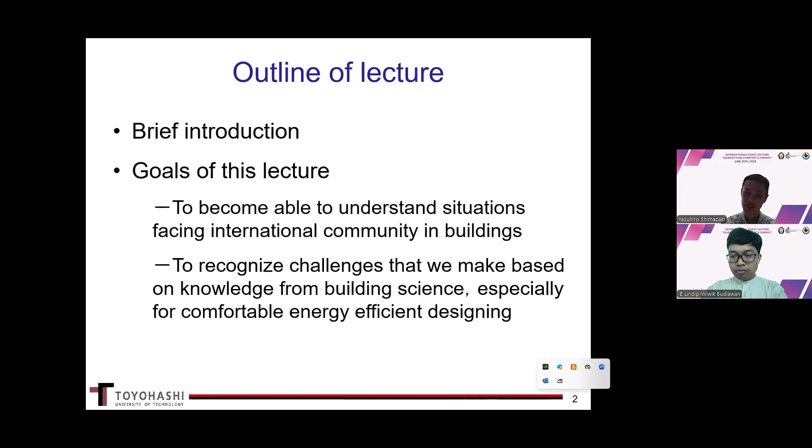First of all, I want to give a very simple self-introduction. Dr. Wiwik already did my introduction, but I'd like to give a small one myself. Then I want to talk to you about creating comfort and energy in a building. After this lecture, I hope you can understand the situation facing the international community in building, and recognize challenges based on knowledge from building science, especially for comfortable, energy efficient design for architecture.

So first part is the self-introduction. It's quite natural you may wonder who I am. I'm a doctor of engineering. I received my PhD from Osaka Prefecture University in 2010, and now I'm an associate professor working for the Department of Architecture and Civil Engineering at Toyohashi University of Technology. Because my primary interest is the human itself, my research mainly focuses on the living environment. I'm currently investigating comfort design from various aspects, such as thermal, acoustic, and material like clothing, focusing on the effect of urban and building components, using both field measurement and numerical simulation. We do both measurement and simulation.

Next, I'd like to introduce our university, TUT. Some students and professionals may know the name TUT because we have an MOU agreement between us. TUT was established about 50 years ago as a research university by the Japanese government. The mission of TUT is to conduct research and education in technological science and develop new technology through scientific inquiry. TUT is one of the global-focused universities, and we promote joint international research and personal exchanges. About 15 to 20% of the students come from overseas.

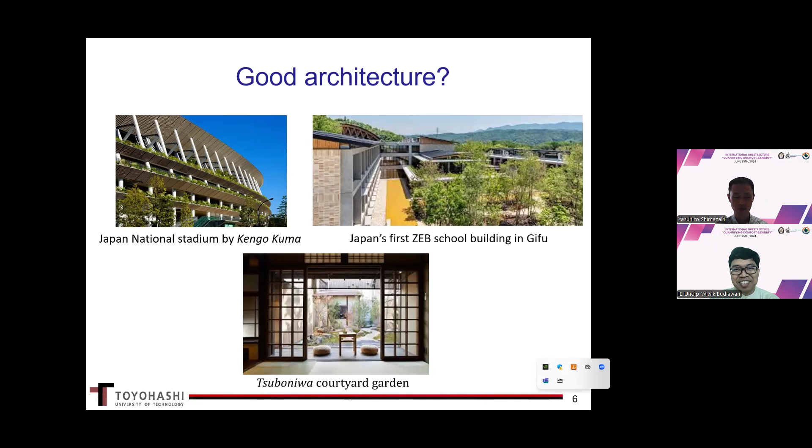The research needs to draw up the concept for the kind of architecture to be built and compile the basic plan. This knowledge for planning and designing drawing is, of course, fundamentally important.

The buildings are, of course, subject to loads and to forces such as earthquakes and wind. So the architect must stand up to these forces while staying safe. The knowledge for dynamics or the technology for structures and materials we use is, of course, important.

And the architecture is for the occupant, from my viewpoint, so we need to look into how we can create comfortable space by planning and designing.

It also requires consideration of the physiology, human physiology and psychology of the occupant, and the global environment. The environment topic is more and more common in architecture. In this lecture, we are focusing on the architecture environmental area.

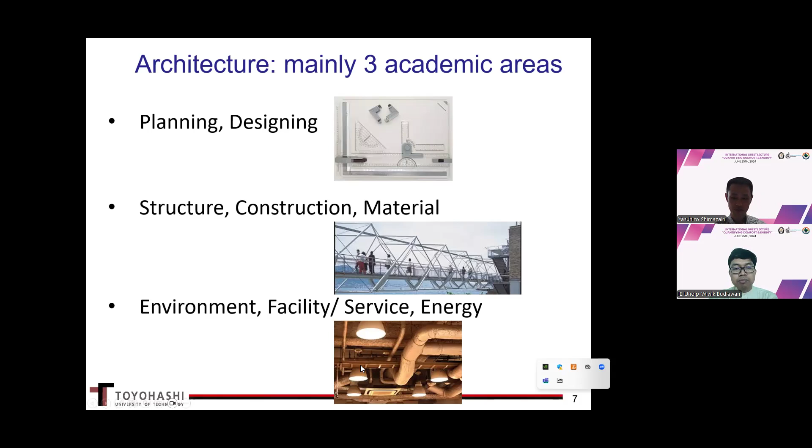So to summarize, building science in this lecture is a field of study concerned with the technical performance of building materials and building systems.

Of course, building science is broad enough to include construction technology, material science, urban design, architecture physics like heat and mass transfer, and also meteorology or climatic knowledge, and so on.

Building science is gathering attention because the issues of sustainability, pollution, energy use, and occupant health are becoming increasingly important.

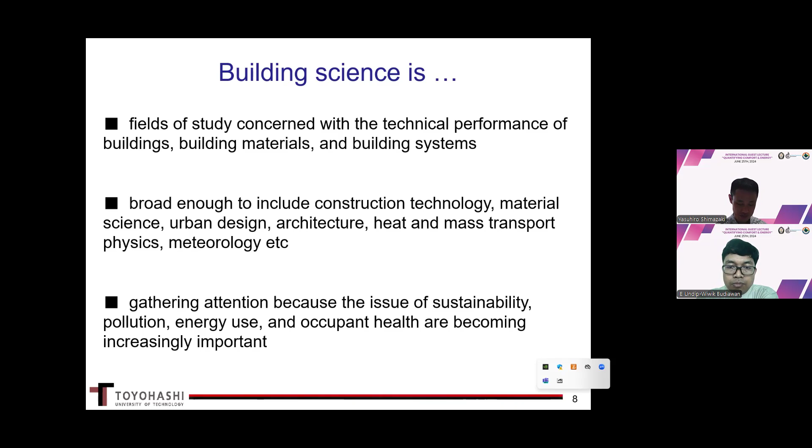Building science is a broad term that refers to our knowledge of the physical behavior of the building - heat, light, sound, air quality - and their impact on energy efficiency, comfort, health, safety, durability, and so on. It is application to the built environment.

Building services is also our field. Building services are the systems installed in buildings to make them functional, efficient, and safe.

So based on the knowledge of building science, we should install building services for comfort and energy, and so on.

So in environmental engineering in architecture, we explore the design and systems in buildings, and the effective use of energy and material.

I have to emphasize that the important mission of our study field is to provide comfort in the building with minimum energy use.

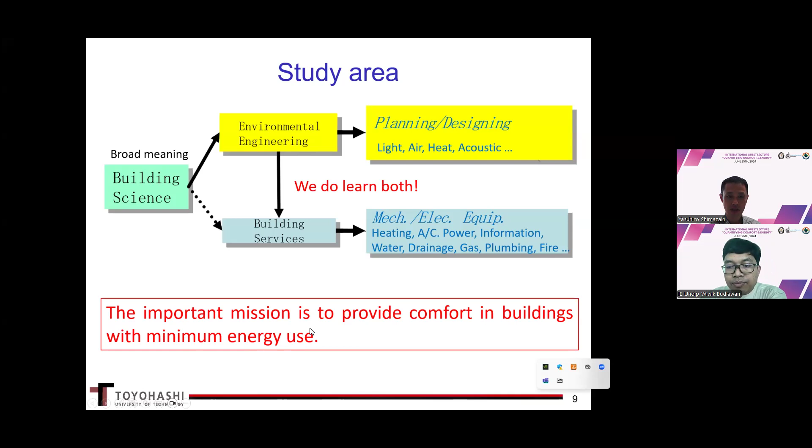So the motivation and objective in this study field is to balance comfortable life and energy saving for architecture and urban design passively.

And to gain a comprehensive understanding of the outer building indoor environment for a better future.

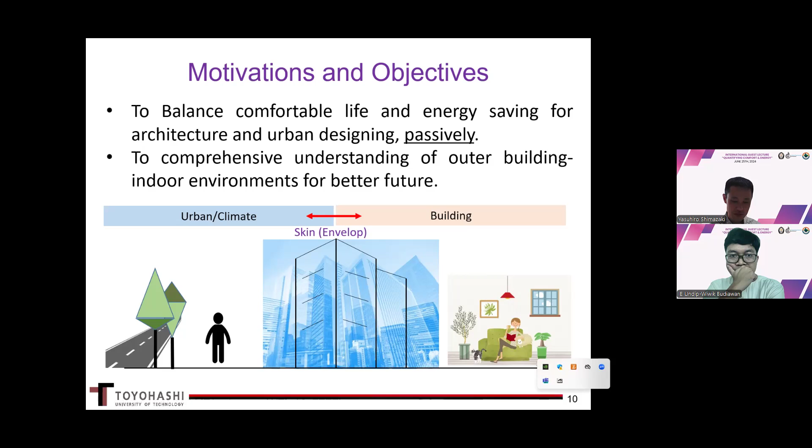This slide shows the conceptual relationship between comfort and energy. In general, the outdoor climate fluctuates largely. In Japan, we experience the cold winter and also the hot, humid summer. So they fluctuate like this, the green line. The outdoor climate fluctuates largely on a daily basis, day and night, and on a yearly basis, winter and summer. On the other hand, the comfortable range, namely the red dot line, is relatively narrow compared to the climatic changes like the green line. So in order to achieve the comfortable level, we have

two ways. One is passive solution, the other is active solution. The passive solution or passive technology, or the active solution or active technology. A passive solution uses architectural means without energy. And the active solution uses equipment or services such as AC, fans, and so on, and of course uses energy. So in this sense, we utilize the passive solution first, then minimize the use of active solutions. Totally combining both the active method and the passive method for thermal comfort, leading to reduction in energy consumption.

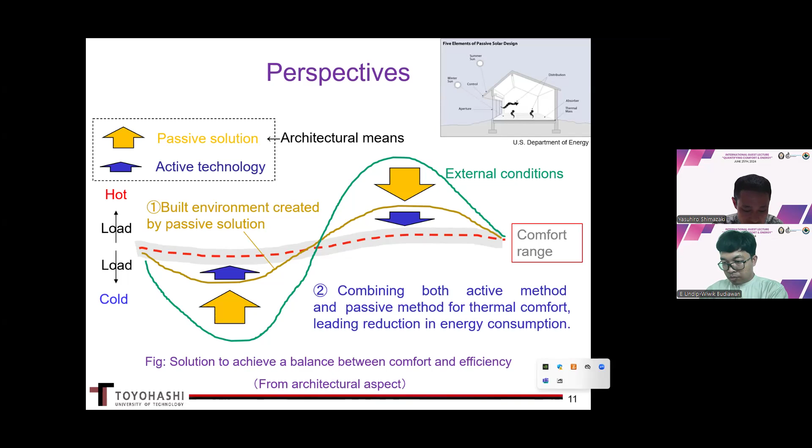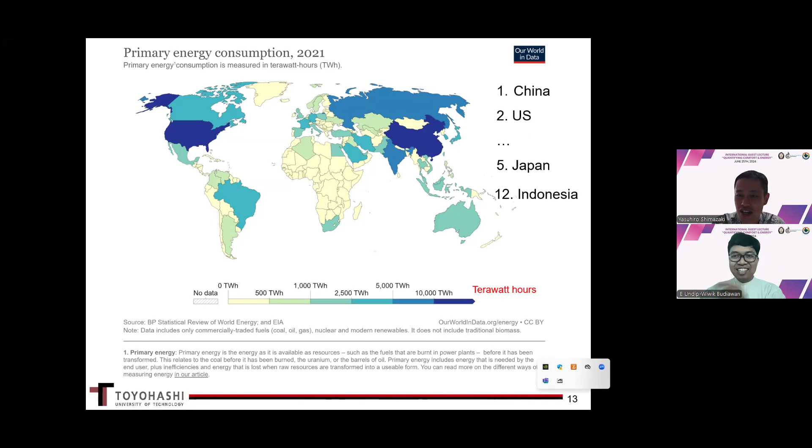Maybe 20, 30. The Indonesia is the 12th place. Indonesia is the 12th largest energy user globally. How do you think about that? Some professors are laughing, it's quite interesting. Yeah, because Indonesia has a larger population, they use energy, of course.

Yeah, there is a well-known fact that the building is the world's greatest energy user. You can see the graph here. This is the case for the US. You can see the breakdown of the energy consumption in the USA. The energy consumption in industry is decreasing, but it's about 1/3 of the energy consumed by industry. On the other hand, energy used in buildings is increasing. And about 40% of the energy is used inside the buildings.

Most of the energy used in a building is used to maintain a comfortable indoor environment. In terms of thermal comfort, you can see that both for the residential and the commercial building, the cooling and heating has a larger impact on energy use. And also the ventilation requires some energy. The other energy use, other than cooling and heating, includes lighting, hot water supply, and household appliances, and electric equipment.

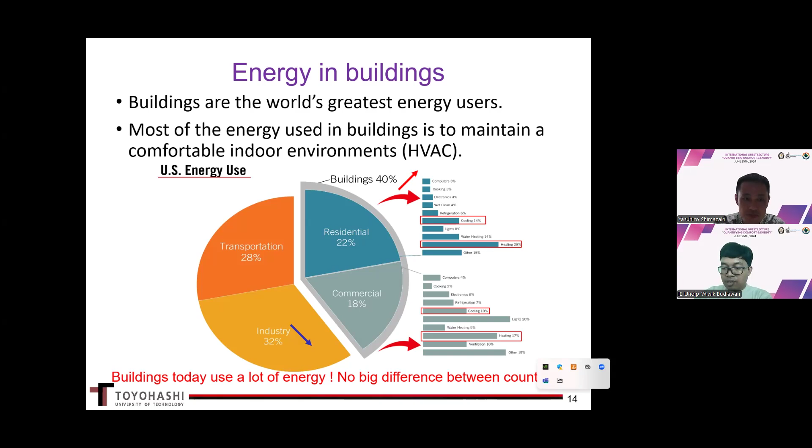And this graph shows the annual energy consumption in the household in Japan. Similar to the US in the previous slide, the daily operation uses most of the energy, and more than 50% is consumed by the heat source, such as heating, cooling, and hot water supply. The energy use is correlated with the temperature difference and the period of use. So normally, the heating energy is much larger than the cooling in the northern hemisphere, like the US and Japan situation. Of course, Japan is a large country from north to south, so the situation is quite different in Hokkaido and Okinawa, but on average, the energy used for heating is quite larger compared to cooling. Actually, we have a tradition to take a bath, so in Japan we use energy for hot water. This is one of the features of the Japanese situation.

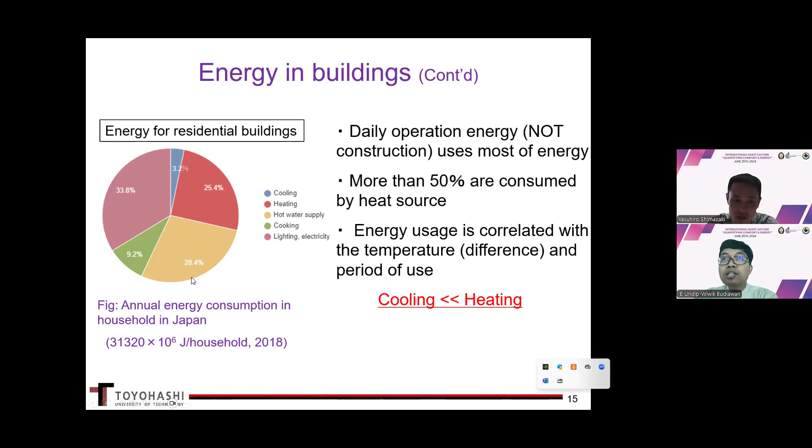Okay, to summarize, yes, of course, the building has a significant impact on the natural environment, human health and comfort, and energy consumption. But we did not say that we should just endure without energy. So we have to utilize the passive solution. The important mission is to provide comfort in buildings with minimum energy use. Again, behavior modification and a deep understanding of architectural means is required.

Because this is just one example. In Japan, the air conditioning setting for summer is different from other parts of the world. When I went to Jakarta, the temperature setting for the AC in a hotel was quite low for me. I felt too chilly, at about 16, 18 degrees Celsius. It's normal there. So a deep understanding of energy and comfort is, of course, important. I really understand that, yeah.

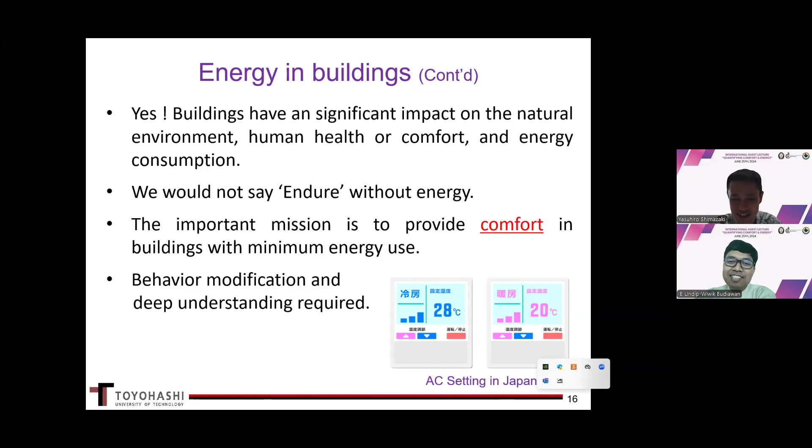It's important to achieve a comfortable life and energy saving in architecture design. In this slide, I introduce the concept ZEB, standing for zero energy building. ZEB has become recognized as important for energy conservation and global warming prevention. Of course, the term zero energy is very exciting, but it's not actually possible.

So what zero energy building means is net zero energy building. At the heart of the ZEB concept is the idea that the building can meet all its energy requirements from low cost, locally available, non-polluting and renewable sources. At the strict level, the ZEB generates enough renewable energy on site to equal or exceed its annual energy use in the building.

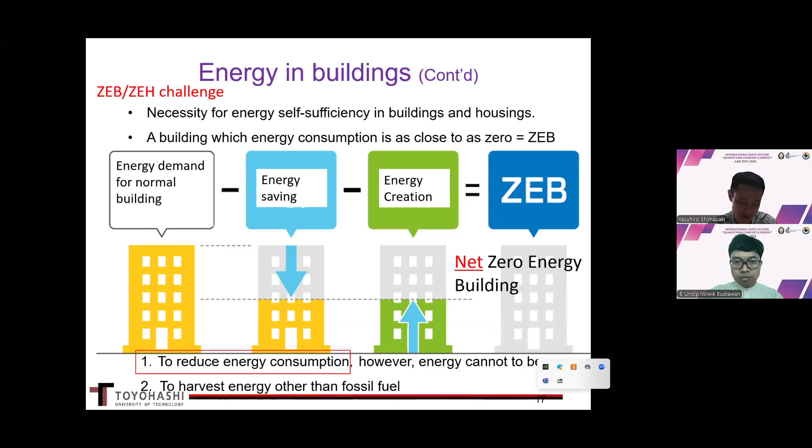So next, we give some information regarding comfort in a building. Comfort can be defined as the state of physical ease and relaxation and freedom from distress. Comfort in a building is affected by a great number of different factors, such as thermal and air quality, noise level, and visual comfort. In some cases, even personal factors can affect our comfort. So it's important to understand comfort in relation to humans, and the control and limits based on the nature of the physical environment.

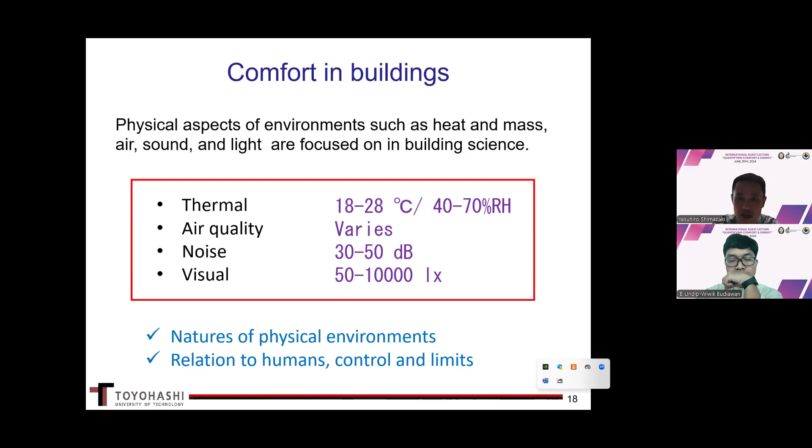Normally, the term comfort expresses satisfaction with the environment based on the ISO standard. However, in my opinion, thermal comfort is more than just a pleasant condition because it's part of some action, subconsciously or consciously executed, to maintain the core temperature within a very narrow range around 37 degrees Celsius.

Normally, the AC controller has only a temperature setting, so many people think thermal comfort is directly associated with temperature, but this is not the whole truth. The graph here...

illustrates the relationship between thermal comfort and thermal sensation. The neutral thermal sensation is considered as the means of thermal comfort, so the neutral state equals comfort. This is because there is no physiological temperature regulatory effect at that condition. So comfort decreases while thermal sensation, for both heat and cold, increases rapidly on each side of the neutral point.

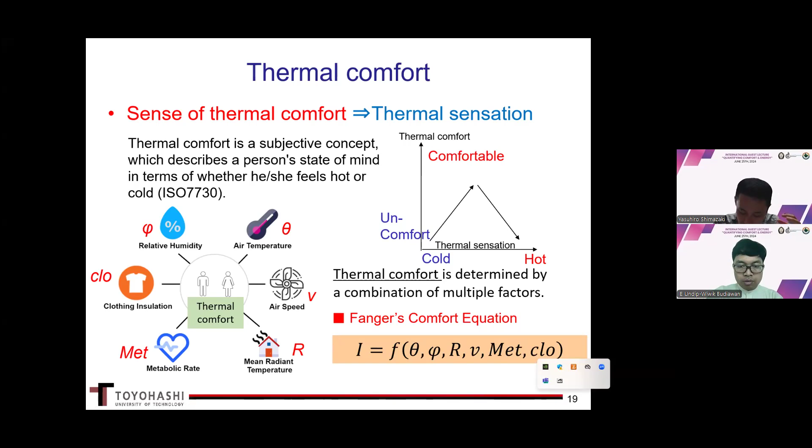In 1970, the famous Fanger highlighted the conditions necessary for thermal comfort, as well as the principles and methods for evaluating and analyzing the thermal environment. This is called Fanger's comfort equation. The most important variables affecting thermal comfort are not just temperature, but also humidity, radiation, air movement, metabolic rate (the activity level of the occupant), and the insulation of clothing. Please remember there is a seventh parameter that is also important: the human mind, such as individual expectation and acceptance.

As for quantifying both energy and comfort in a building, calculating thermal load is useful. The thermal load is the amount of energy added to or removed from a physical unit. Since energy from HVAC systems is dominant, as I told you previously, energy can be evaluated by the air conditioning thermal load. For thermal comfort, the thermal state of a human can be evaluated using the human's thermal load. For both cases, it's preferable that the thermal load be neutral, and the thermal load should be smaller so that the change in internal condition stays within a narrow range.

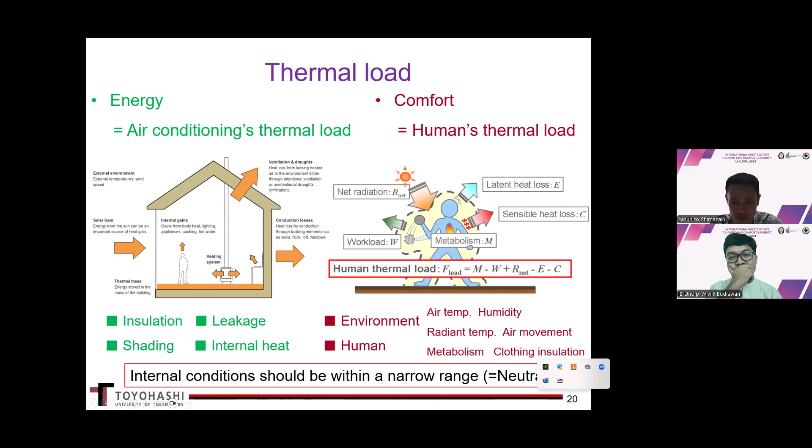This is one of the concepts for my research, one of the main functions of the building. Now I'd like to talk to you about the relationship between comfort and the building. One of the main functions of the building envelope is to act as a barrier or filter between the external and internal environment.

The net heat exchange between them, under steady state condition, delta Q, is calculated using this equation. This delta Q is the conditioning thermal load. The estimation of each term is discussed here. The concept and fundamentals of the conditioner are based on heat gain and/or heat losses, namely delta Q, in a building.

So you will need to remove the amount of heat gain if it's hot outside, and similarly you'll need to add heat to your space if the outside temperature is cold. This is the air conditioning thermal load. In short, any heat gain and any heat loss must be equally balanced by heat removal and heat addition to get the desired room comfort that we want.

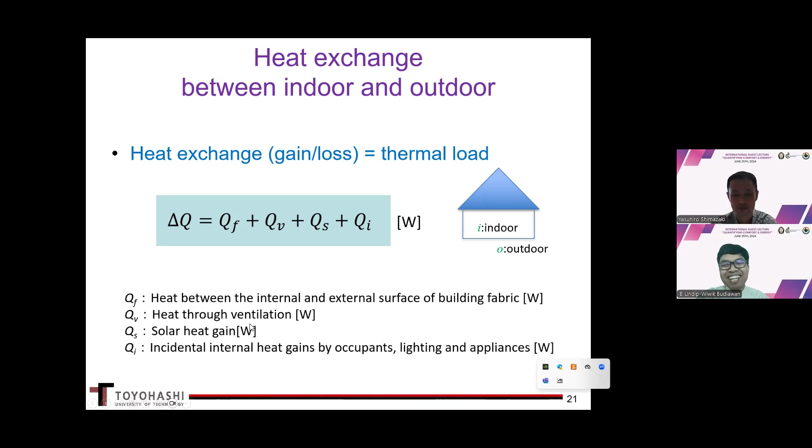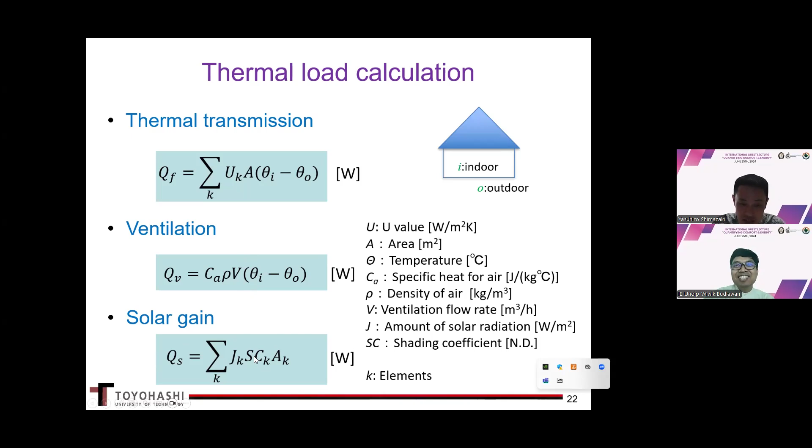The heat transmission of the floor, exterior wall, ceiling, window, and doors can be calculated using this equation. The heat loss and gain caused by ventilation can be calculated using the middle equation, depending on the heat capacity of the air, and the solar load on the building is calculated with the lower equation. The internal load will vary depending on the usage of the space, so I cannot show it here.

Sorry, some figures are written in Japanese, but this is quite an interesting figure. This figure shows the heat path between the indoor and outdoor. The upper side is the winter situation, the bottom side is the summer situation. About 52% of the heat or energy is lost from the window in the winter situation, because the window is the weakest point against heat loss.

This is the summer situation. Again, through the window, heat is gained. About 70% of the heat gain is from the window. It's quite interesting. So of course insulation plays an important role in making a building energy efficient by keeping it warm inside during winter. However, the same property can lead to excessively high temperatures in summer. Sometimes the insulation absorbs a lot of energy and releases it later, especially when the design is not adequate to consider solar heat gain. So normally we have a standard for the U value, and additionally a shading coefficient for solar radiation performance is added to the standard for energy saving.

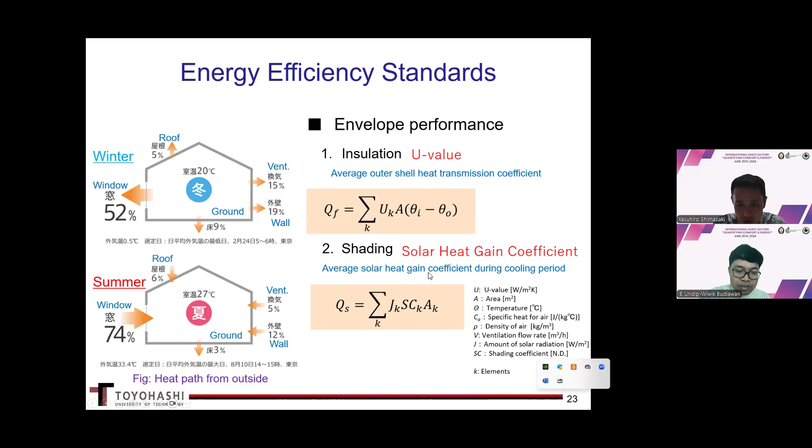This is one of the examples of the energy efficiency standard in Japan. The data suggests the importance of reducing energy consumption for heating in the winter season. As I showed you previously, the heating energy is much larger compared to cooling. So we discussed

winter energy reduction. Japan is situated in a temperate zone, and simple wooden buildings are the major architectural form. So the idea of having a warm house and energy efficient building never occurred to the mainstream until the 1970s. Since the start of rapid economic growth in Japan during the 1960s, before my birth, Japanese industry began to promote the popularity of air conditioning at the time. Since the establishment of the Energy Conservation Act in 1979, the building standards and energy conservation standards have been revised substantially in the form of thermal environmental performance requirements for buildings.

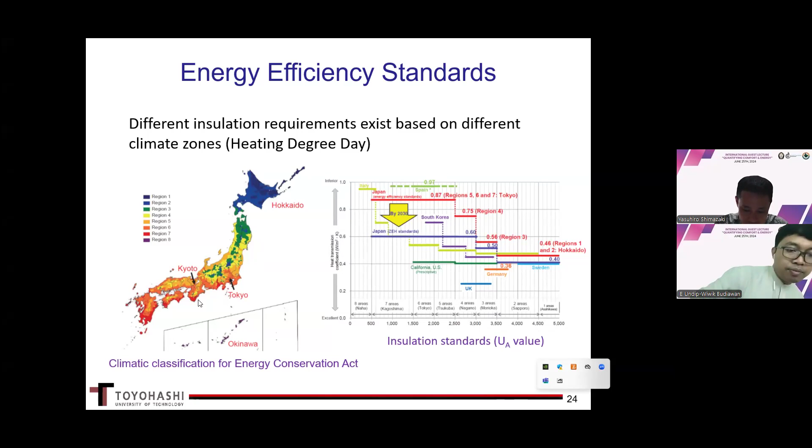Okay, so in order to assess thermal comfort, considering the energy balance of the human body is useful. The human body constantly produces heat energy from food, and the heat needs to be released at the proper rate to keep the body at a constant temperature level around 37 degrees Celsius. Any heat gain or heat loss from the thermally neutral state is experienced as a hot or cold sensation of discomfort. So the transport of heat from the human body is mainly through convection, radiation, and evaporation, the physics of heat transfer.

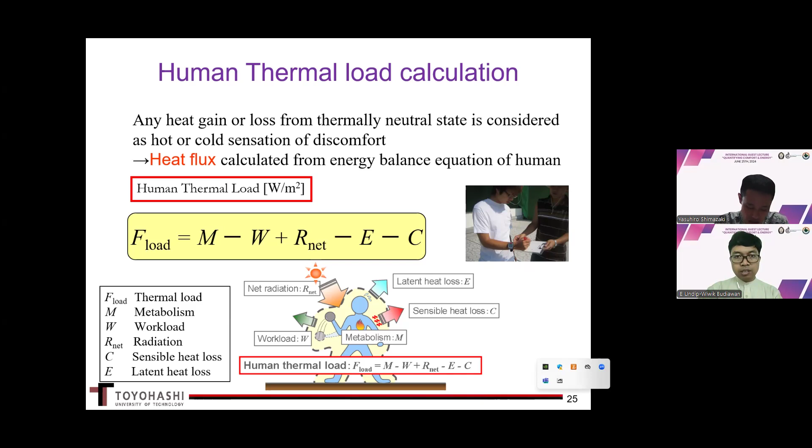And actually it depends on the situation, but under certain conditions, we can successfully quantify the thermal environment, the thermal perception, by using the human thermal load, so that we can apply this kind of knowledge to the analysis of the present state and to environmental design, urban design. By using analysis like CFD, we can conduct a prior assessment before constructing something. So this kind of thermal load calculation is very useful too. We can utilize it for measurement, and we can utilize it for analysis too, like CFD, for designing.

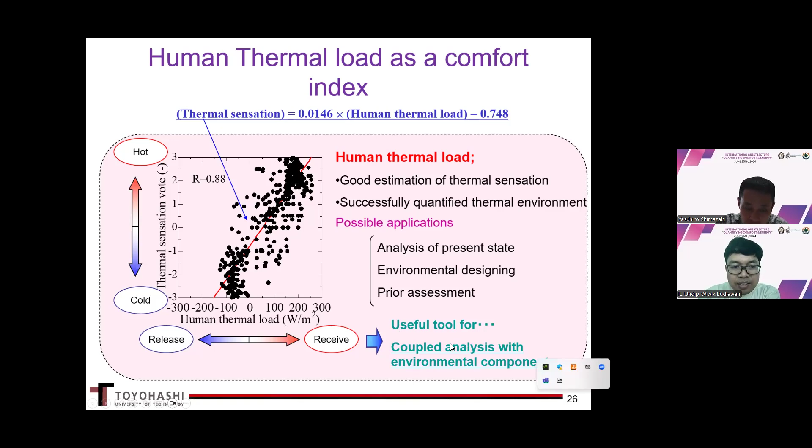Okay, so now we are applying our quantification method based on energy flow. The visualization of the environment allows us to quantify the thermals and human comfort for various fields in the industry. I have many collaboration studies with industry. This kind of methodology for quantifying comfort is very unique, I think.

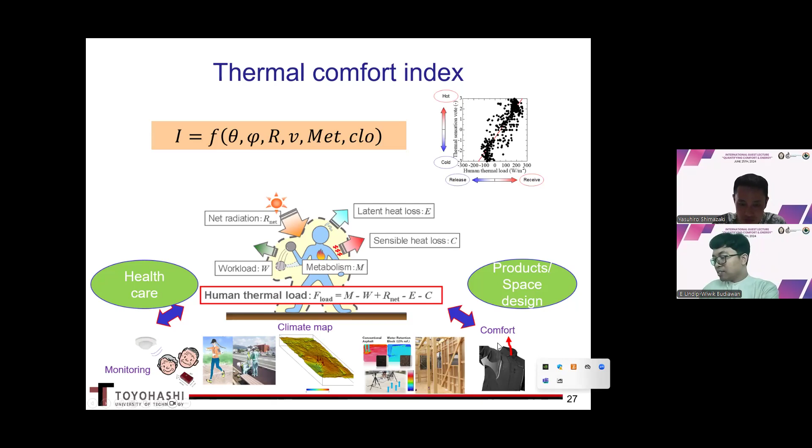You can see in this slide our ongoing projects, from small scale, like fabrication of material such as clothing material or building material, to large scale, like our urban component, so the urban planning itself.

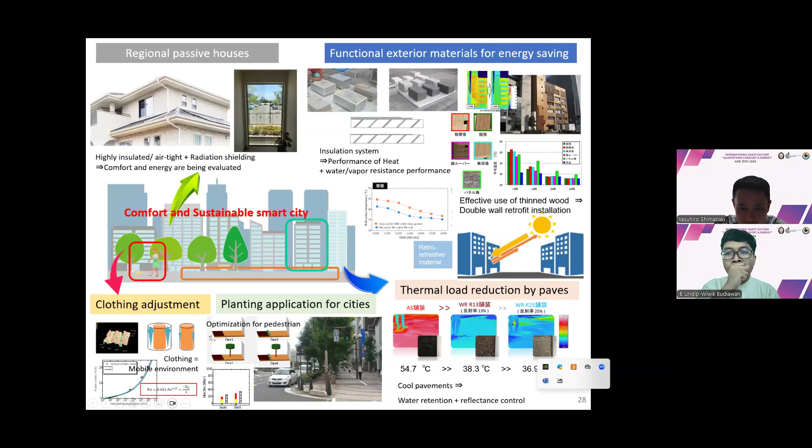Okay, I can show you some examples from the next slide. This slide shows a project for modification of the urban surface for urban heat island adaptation, and also a comprehensive evaluation method for thermal, noise, and visual comfort. We'd like to achieve a fundamental understanding of the combined effect of thermal and other components such as noise for the pedestrian.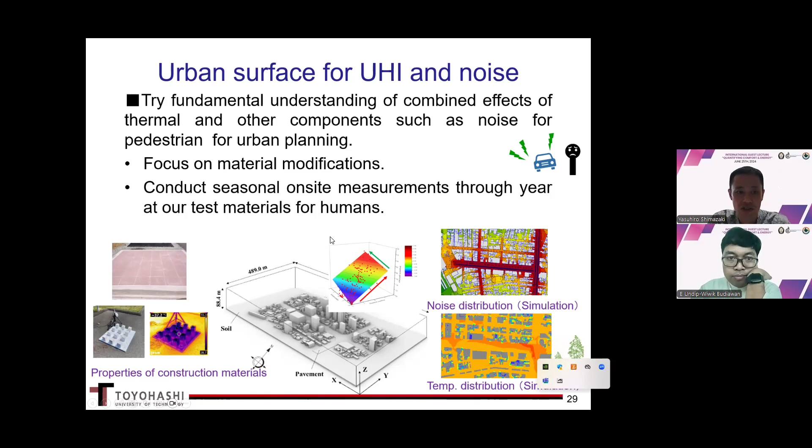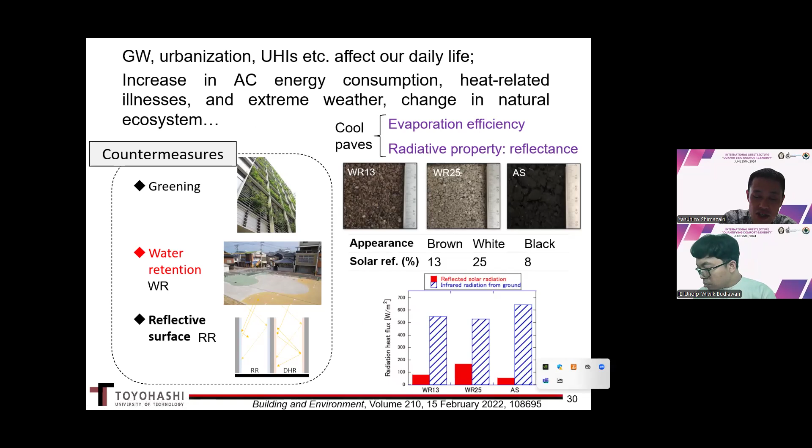Okay, so this is also the project for the building envelope. Our special knowledge is for water retaining material, global warming mitigation, urban heat island, the increase in air conditioning energy consumption related illness, and the extreme weather trends affecting the natural ecosystem. So we'd like to install special material in the urban space on the building facade and so on, to reduce energy and increase comfort around the building and built environment.

Maybe time is limited, so I cannot introduce detail. This is the project for fabrics, HVAC and climate. We mainly focus on the effect of insulation, shading, and the HVAC system on the environment and energy use.

We are now conducting field measurement in a Japanese high-performance house at a specific construction site. We can utilize CFD analysis for detailed situation analysis, and sometimes we utilize EnergyPlus or IES software for energy simulation. Of course, we conduct experiments on site and apply that knowledge to the simulation too.

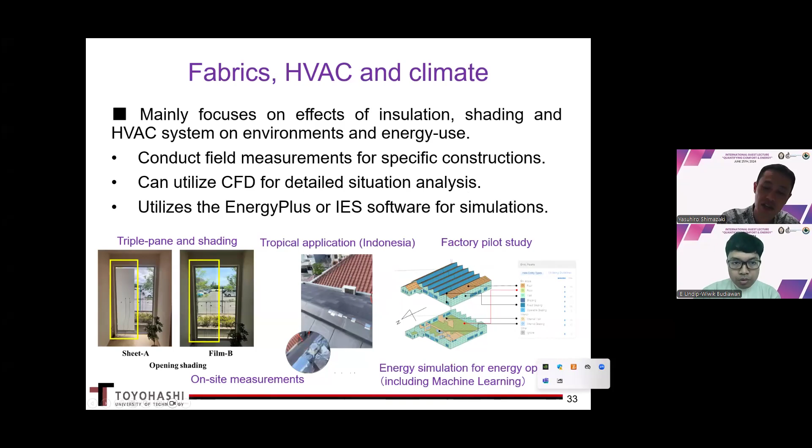Actually, there are so many parameters for building design, so I think a systematic methodology for building design is required. So we are trying to develop a systematic methodology for specific buildings.

So I'd like to ask you to work with me, or with us, on the Indonesian situation. The situation is quite different - material difference, climate difference, and preference and perception differences. So it's quite interesting for me. If you're interested, please ask me.

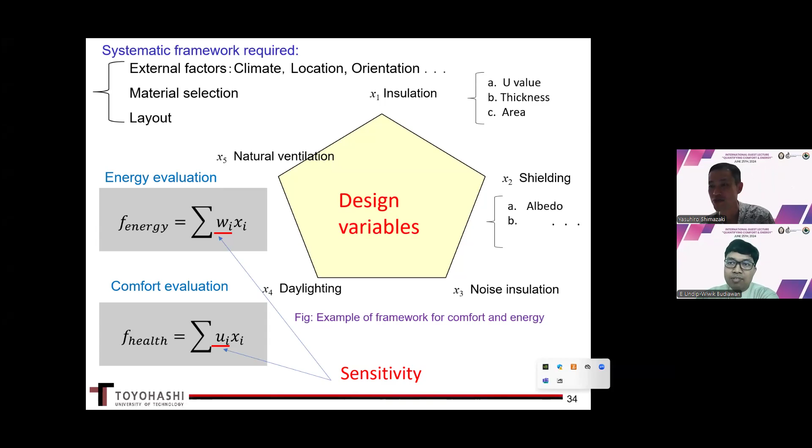And this is also one of the unique trials of our laboratory. We are trying to apply this knowledge to individual adjustment. Actually, we are working with the clothing industry, because we have tools to qualitatively understand and design clothing ventilation. I think the clothing industry is very analog, not digital, so we'd like to introduce them to digital tools based on physics.

This is one way to design a good product, and we can also take on energy saving and comfort in the building, because we are always wearing clothing. In the Japanese adaptation, clothing is one of the adaptations for cooling and heating - the temperature setting is set to 28 during summer and 20 for winter. This way we can adjust the environment quickly depending on personal preference, using clothing adjustment.

Actually, we are really... I have some very special technique to quantify inside the flow and the ventilation inside the clothing, the interaction between the human, the clothing, and the environment. This is why I conduct the experiment and the research about the clothing.

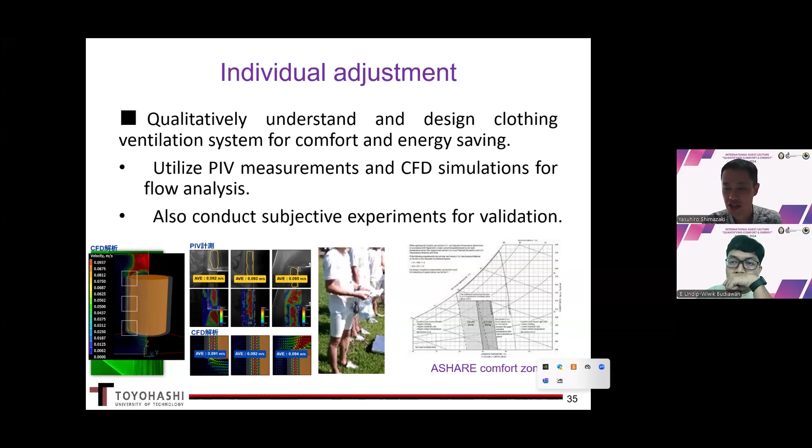Yes, of course, the principles of environmental science and physics in buildings are fundamentally the same all over the world. They are the same between Japan, Indonesia, US, European countries. The physics are the same. But different countries and regions express their requirements in a variety of ways - the energy, the performance, preference. So local or traditional adaptation is of course applied.

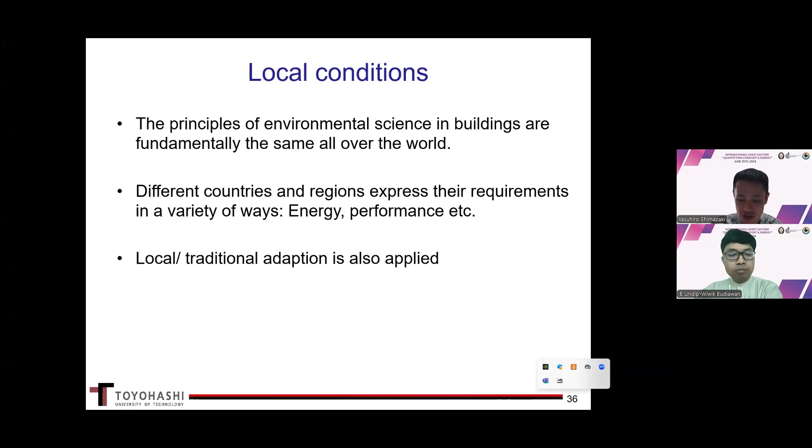This is the climatic graph for Tokyo in Japan and Jakarta in Indonesia. In Tokyo, the coolest months the average temperature will be about 4 to 5 degrees Celsius, and on the other hand, in the summer season the temperature will be up to about 30 degrees Celsius. In Jakarta, the yearly temperature is about 25 to 30. The climate is quite different, so local adaptation is of course applied.

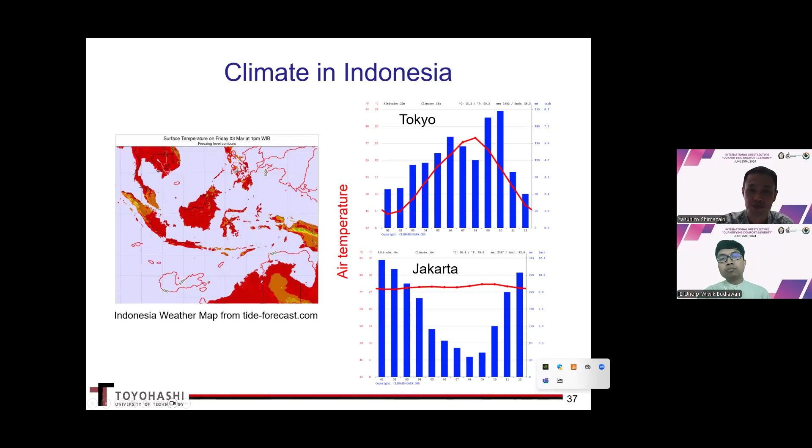So we have some projects in Southeast Asian countries. We are now conducting experiments in Indonesia, like Jakarta, Bandung, Pekanbaru, with some partner universities. I have conducted measurements in Malaysia. I often fly to Indonesia and Malaysia. So please join our collaborative research.

The reason I come to Indonesia or other Southeast Asian countries is because the purpose of my research is the comparison of the residential environment and energy usage among cities in different climates. I'm interested not only in the architecture but also the way of living. Understanding the way of living is one of the solutions for reducing energy.

So the first step is to understand the situation. We compare the thermal preference between them - maybe your preference will be different from mine. In Japan, we experience cold winters and hot summers, but Indonesian people normally get accustomed to the hot climate. So this is one of the keys or hints for reducing energy, by keeping the temperature relatively higher compared to Japan.

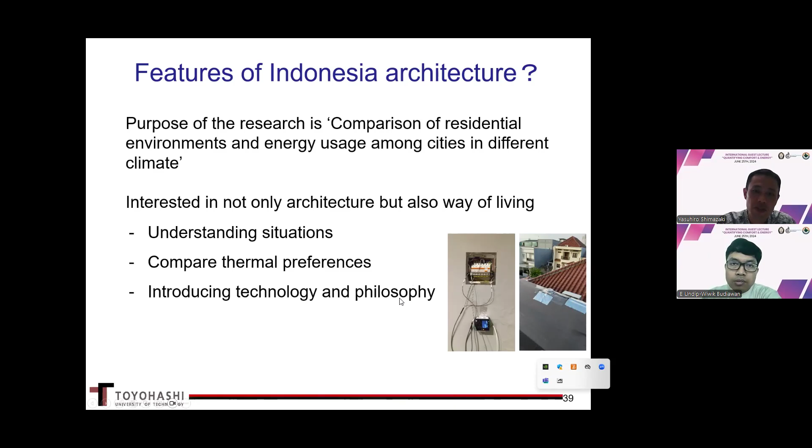Finally, we'd like to introduce some technology and teach the philosophy of building science - this is the last page of my lecture. The building has a significant impact on energy and of course well-being. Building design is normally custom made, and it's important to have the right technology in the right place and the right time - not just the technology, but also the combination of many factors, depending on the situation, responsible for a better built environment of the architecture.

Today, one of the frameworks for a healthy and sustainable built environment is introduced, based on the energy balance, the heat transfer equation of the human and the building. Thank you for the attention.

Thank you very much, Sensei. Wow. 45 minutes and you finished on time. Amazing. Okay, thank you very much, Sensei, for your presentation and for highlighting the topics - it's very specific, so many participants can study or learn about your previous research and projects.